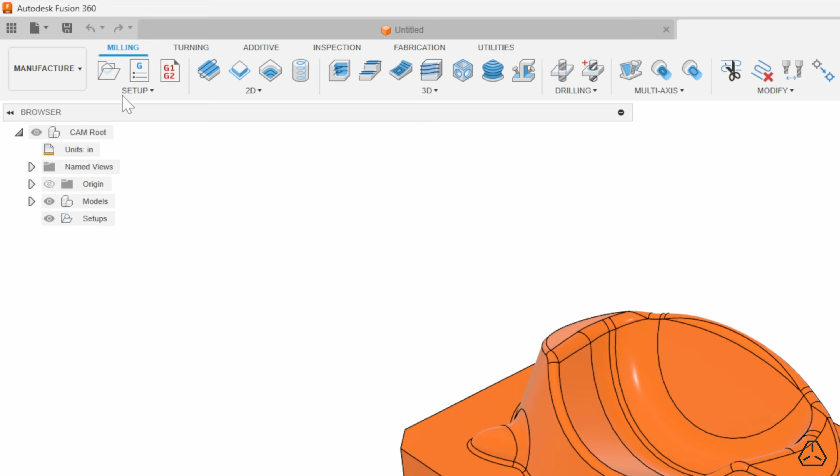All right, so the first thing we'll do is look at the standard workflow. We go up here to File, go to Open, open from my computer, choose a step file or another file type that does not have to be translated while bringing into Fusion 360. We'll hit Open. Once the file is opened, we can go about our manufacturing, creating setup quick.

We can add a template toolpath. And now that I'm done with the file for the day, what I want to do is go to File and go to Export. And I'm looking for this to say F3D. If this says F3Z, I've already saved the file and broken this workflow and uploaded the file to the cloud.

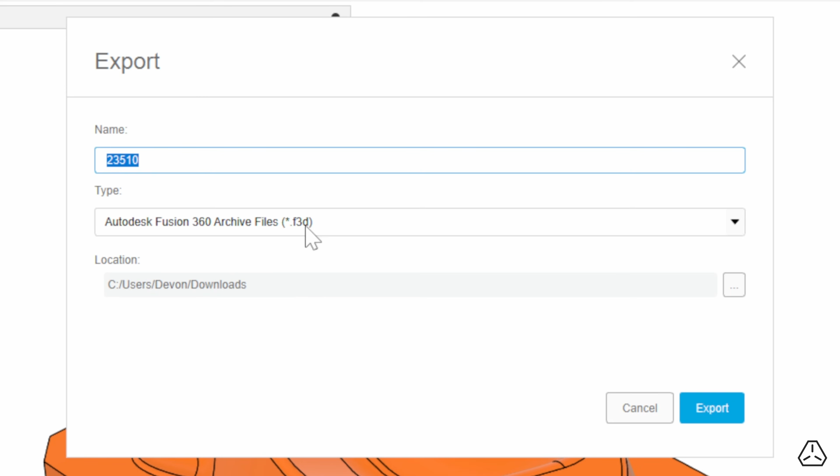So what I'm going to do here is export this file as an F3D. I'm going to hit export. And now, like I said, I'm done for the day. So I'm going to close this file. Fusion is going to ask me if I want to save it. I'm going to say I do not want to save it.

And now I've come in for the next day of work and I want to continue working on that file. I would go to File, Open from my computer. I'm going to choose the F3D that we created. And when I open that F3D file, we'll see that my setup and all my manufacturing is here.

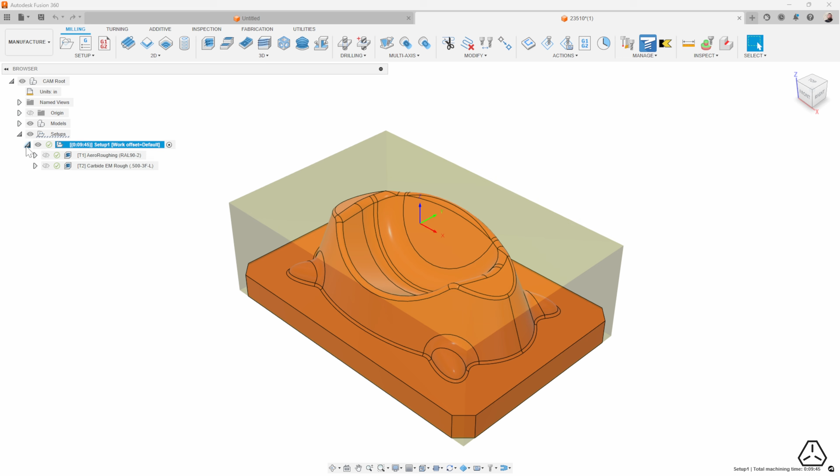So how did this workflow just get improved? The main issue with the workflow that I just did was I'm not able to insert any work holding into this document. If I go into my work holding folder and find a device that I want to insert, we'll see that as I insert this, I get this error telling me the design has not yet been saved.

Now to save this file, it would upload it to the cloud. So this obviously would break our workflow. Let's take a look at how this has been improved.

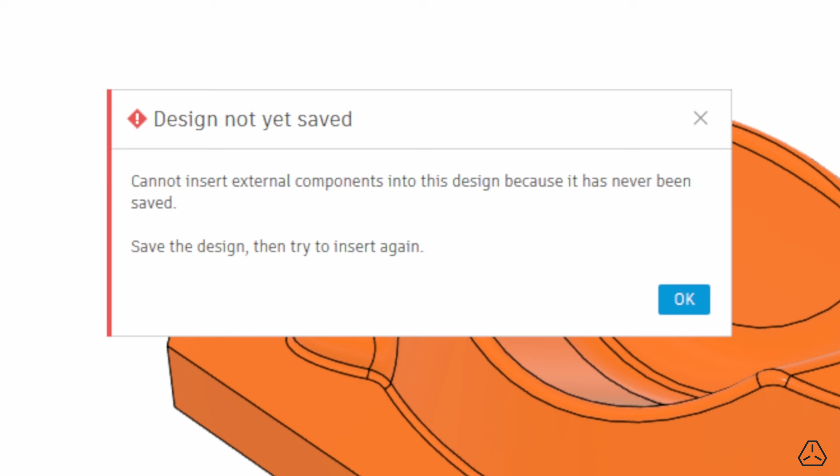We can go to File, Open from my computer, pick the F3D file. We can go to Design, open the data panel here. You can clearly see by the star here that this file has not been saved. This is obviously the one that we just opened.

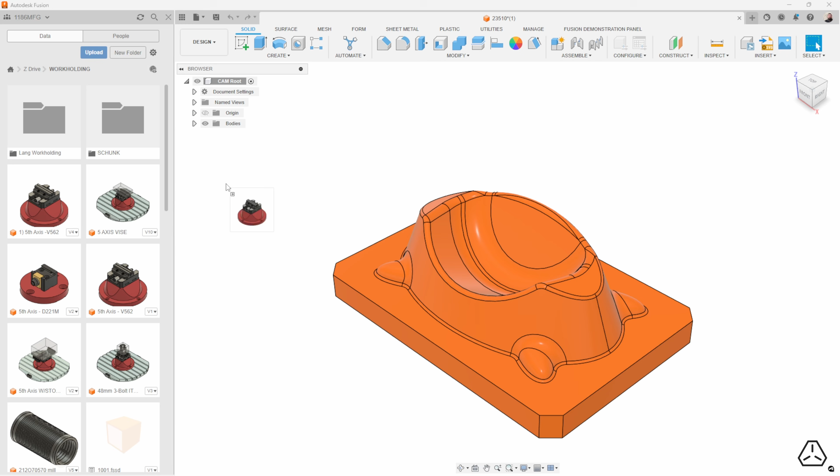I'm going to take this file and drag it and drop it in here. And you can see with this new update, it has allowed us to bring this file in and insert it without saving the document first.

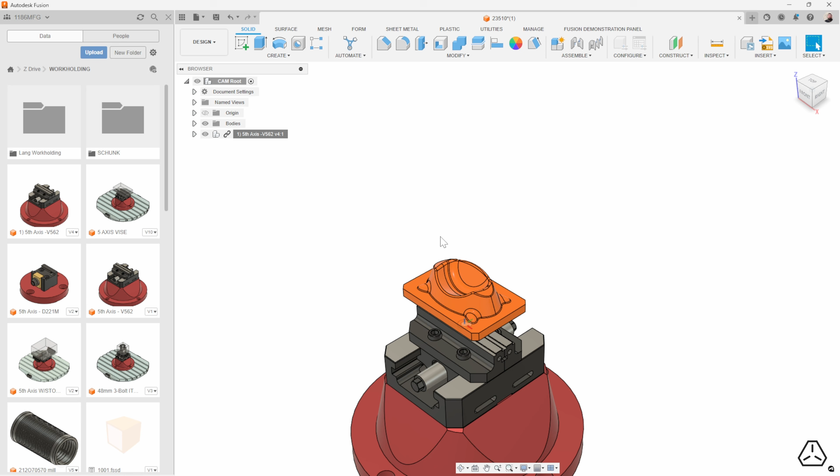Now, if I were to go export this file, it would say F3Z, which is a problem, and it would require cloud translation, and I would have to save it. So to get around that, before we export this file, we just need to break this link.

Now that the link is broken, we can go to Export, and we see that it says F3D. So now we can insert our work holding, do our manufacturing, and be able to export our file still, all without saving the file to the cloud.

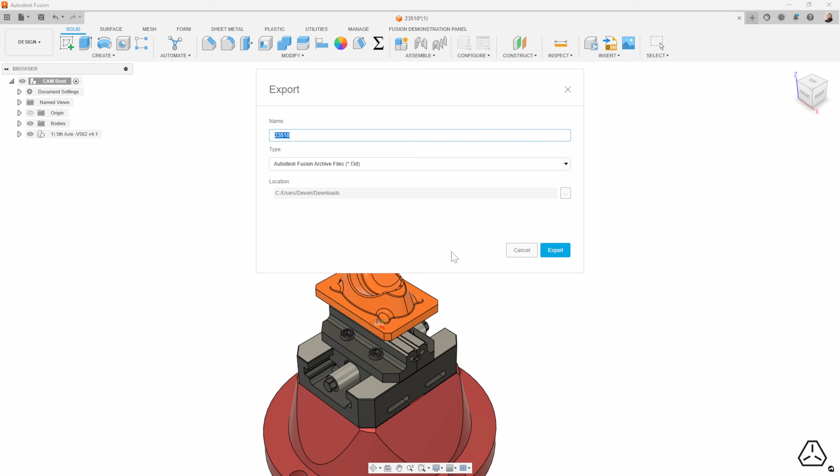The last thing to note, and the one thing that is not working yet, is when I go to my setup, if I want to select a machine, I will not be able to add the machine as this functionality has not yet been updated. Hopefully Autodesk can improve this in the near future.

So we looked at how to save your data locally instead of on the Fusion Cloud.